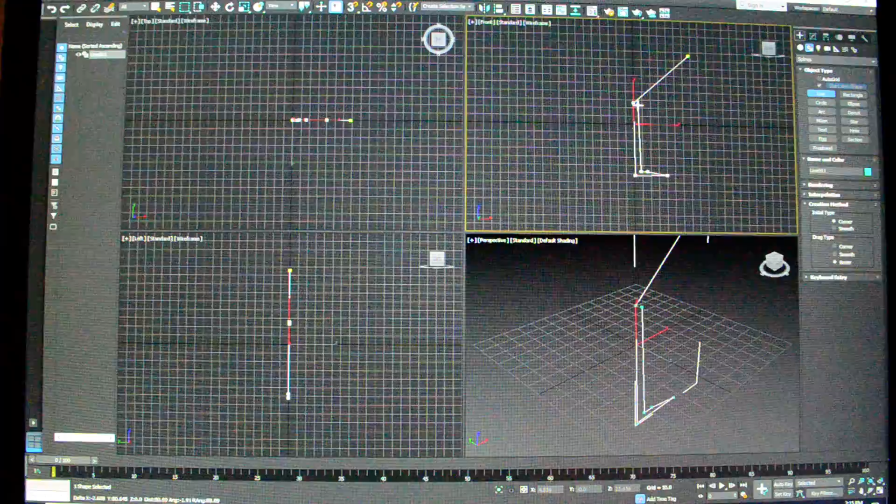Okay, I want to show you an interesting thing you can do with a modifier on splines. So what I'm going to do is I'm going to select line, and I'm going to create a line that is roughly the shape of a martini glass. And I would want to rough this out. Yes, I want to close my spline. I'm going to rough this out, and then I would come in and really clean this up.

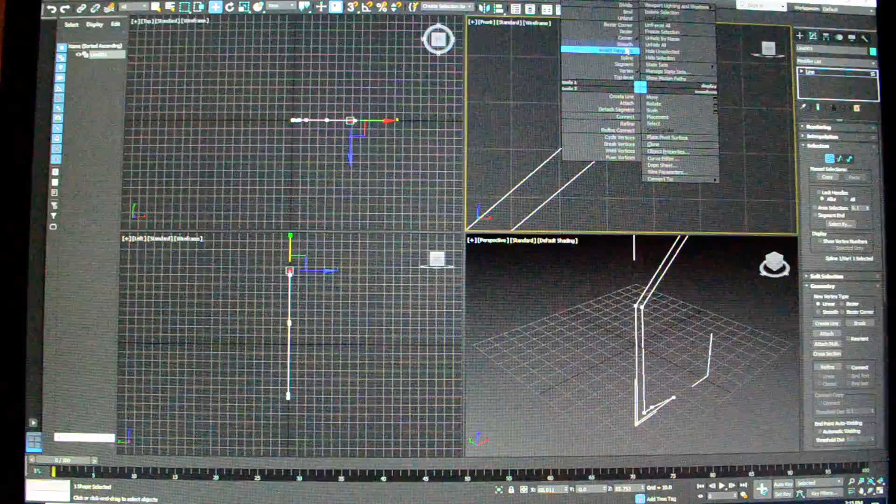Like, for instance, I definitely wouldn't want that sharp edge. So I'm going to select that vertex, right click, and make it smooth so that it rounds it out there. Probably this one too. Change that just to smooth as well. And then, that looks pretty good.

Let's come down here and insert here. Whoa. Right click, and then I want to insert another one here. Okay, and it's created a little bit of a curve there that I want, and I would probably do the same thing in here, just to refine this, because if this were really a glass, it wouldn't have that sharp corner on it.

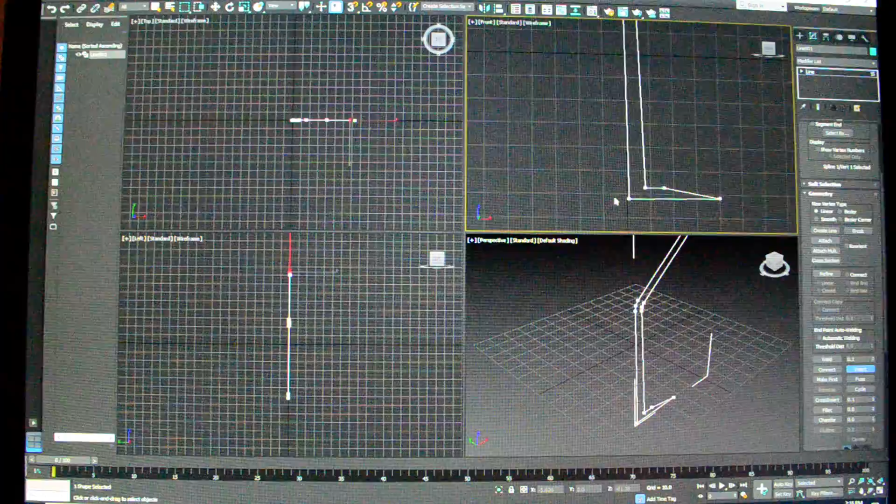Okay, and then I'm going to select it. Oops.

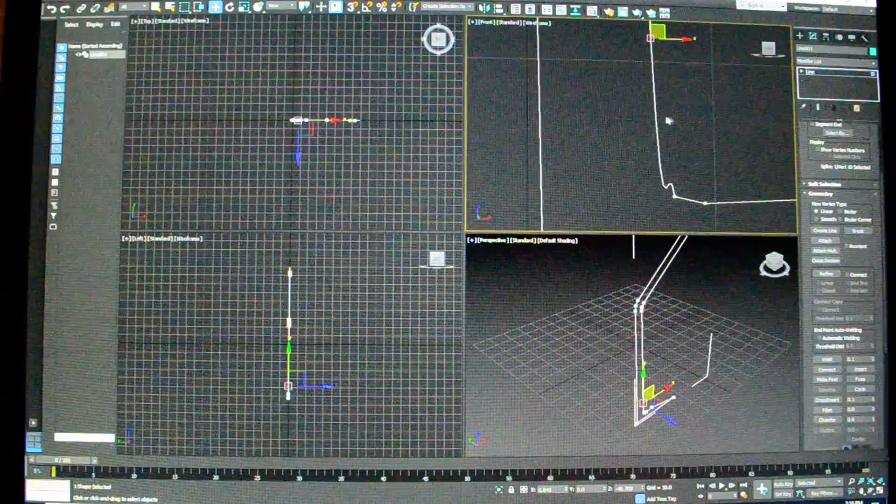Sorry, I'm trying to do this and my cat's over here sitting on my arm. Alright, I can spend hours doing this. Whoops.

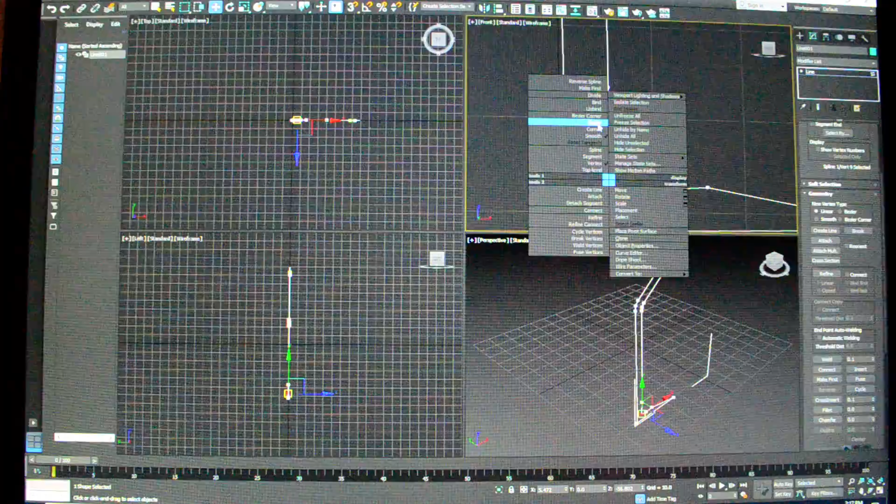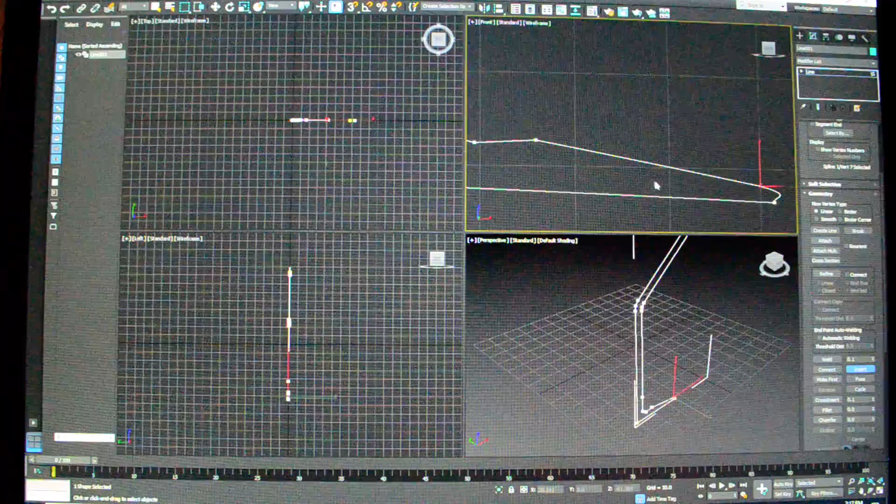Let's try to make it. There we go. Alright, so let's just say we really got this well done. Just the edge of the... I'm going to insert another one right here to help create that flat edge of that foot. Okay, so we're going to take our time, make this beautiful, make it nice.

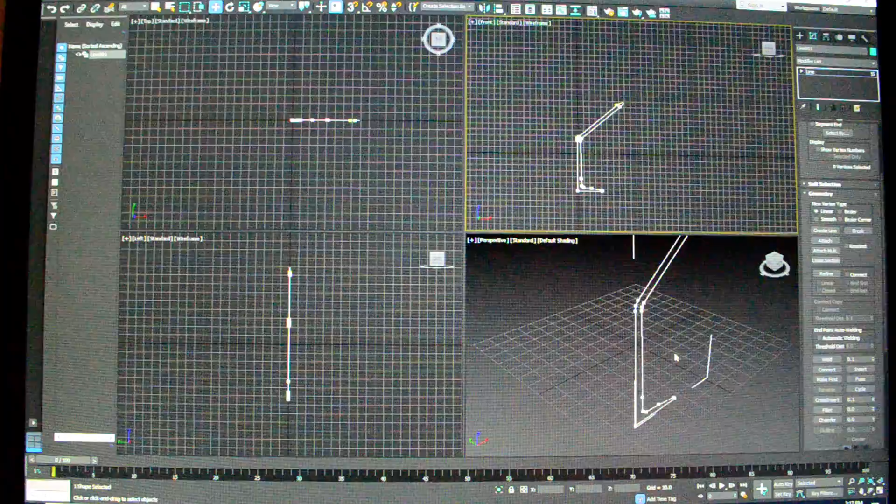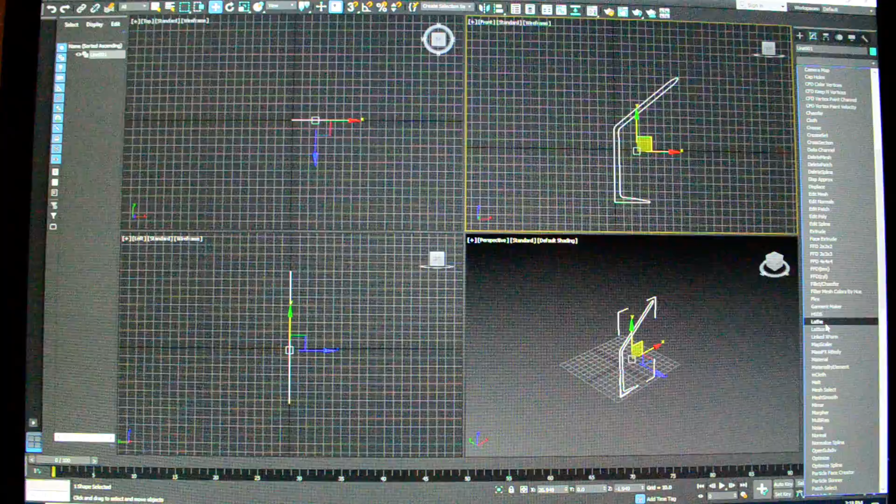Okay. So I've got this closed spline, and it is an outline, as you can see. You can see this over. And I'm going to select it. Whoops, I got to get out of the dots. Okay, so I'm going to select it. And modify, I'm going to pick lathe. And it's going to spin it 360 degrees. I can make it spin less, right? I can do a fraction of this.

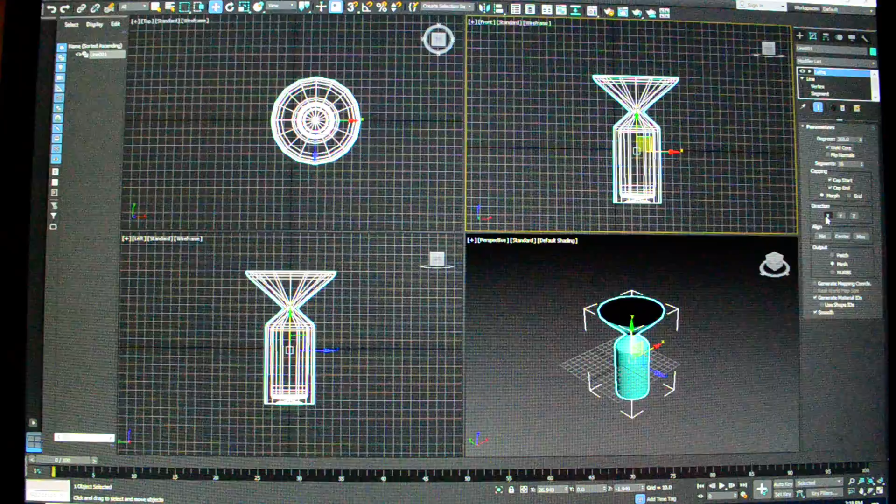Weld the core. How many segments do I want? We'll start with 16. Now the direction is X. The way that it spins it, that's along the X axis. There it's spinning it on the Y. There it's spinning it on the Z. Okay, so we're going with the Y. And then minimum, center, maximum. So it spins it in different directions. So I always just kind of cycle through those to see what looks right.

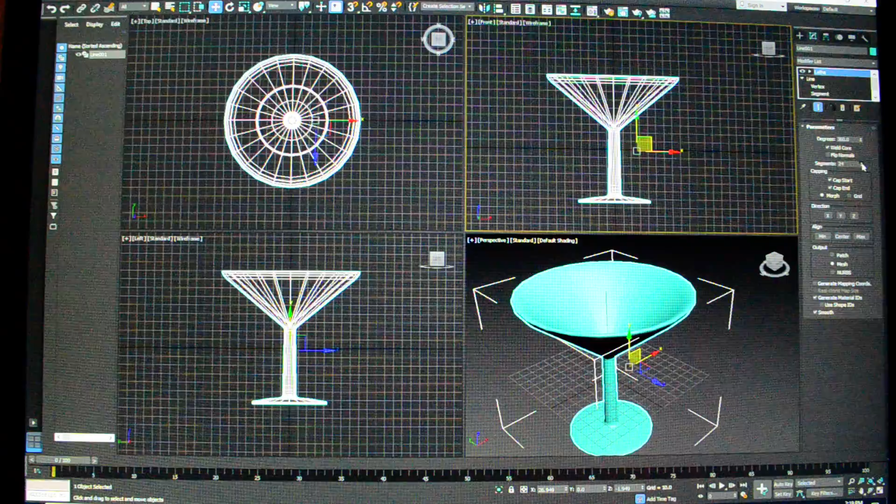And voila. I want this to be a martini glass. Probably going to have to go up around 32, 40. Let's do 40. That's pretty good because I can do a turbo smooth on it. Okay. And there you go. Pretty cool. Let's pick this up off the ground here.

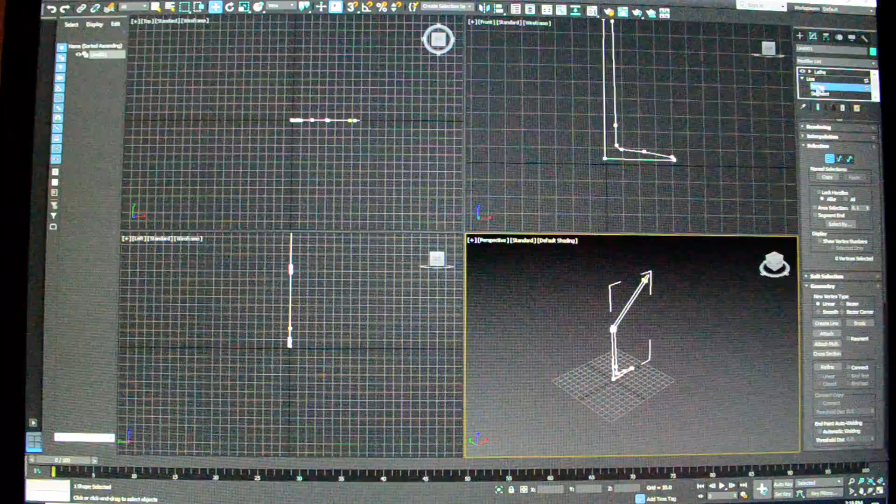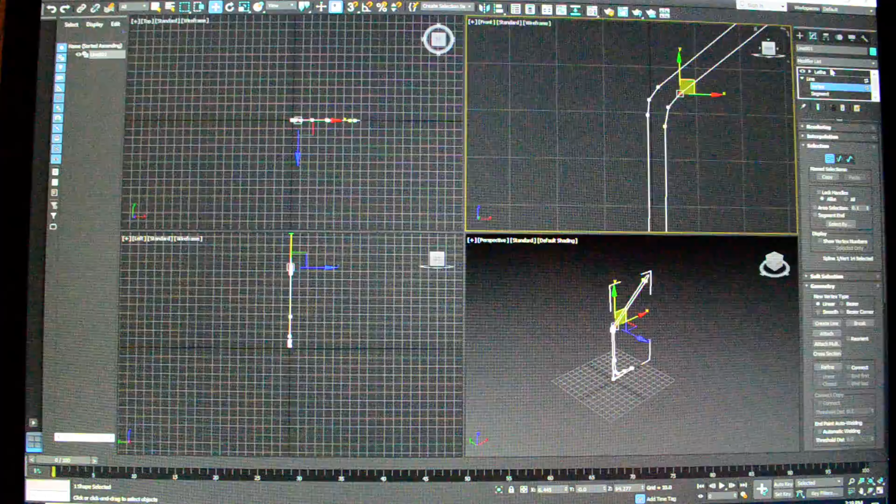And the nice thing is I can always come back and make adjustments to my original line if I don't like something. So I can come in and make a modification to this. Say I want to make this thinner. And come in and make changes. And I'm going to go back to my lathe, and it'll have cleaned it up.

And then on top of that, I'm going to add my turbo smooth. You always want the turbo smooth to be last because it's going to apply to everything down below it. And that's really cleaned up. You know, I had some faceting in here. It's really cleaned it up. I might also want to go in and fix this. It's got that little vortex in there.

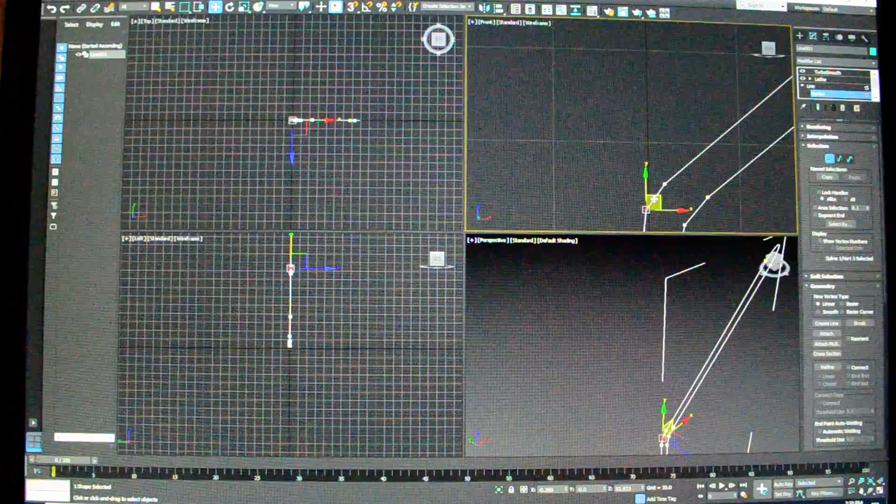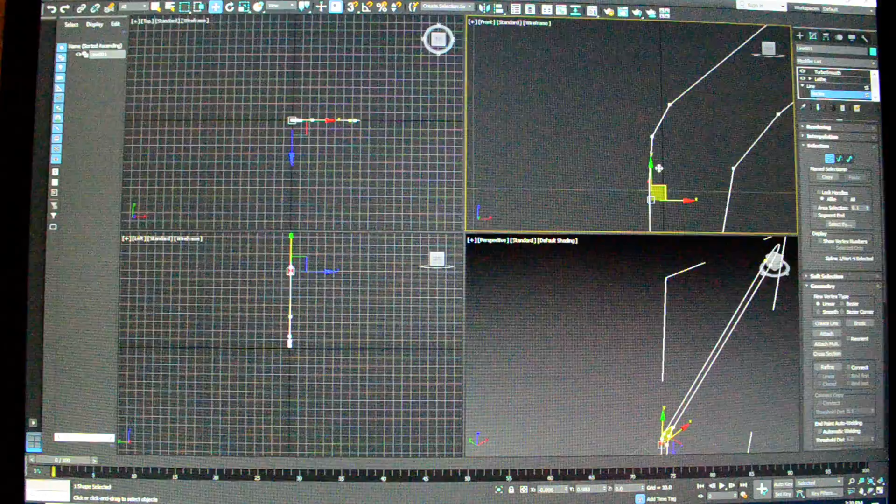And the way I would do that is click on the line. And let's bring this over. Let's see how that looks. It's still in there, but let's do this. Still a little tiny one in there, but it's not too bad. And so now I have a martini glass.

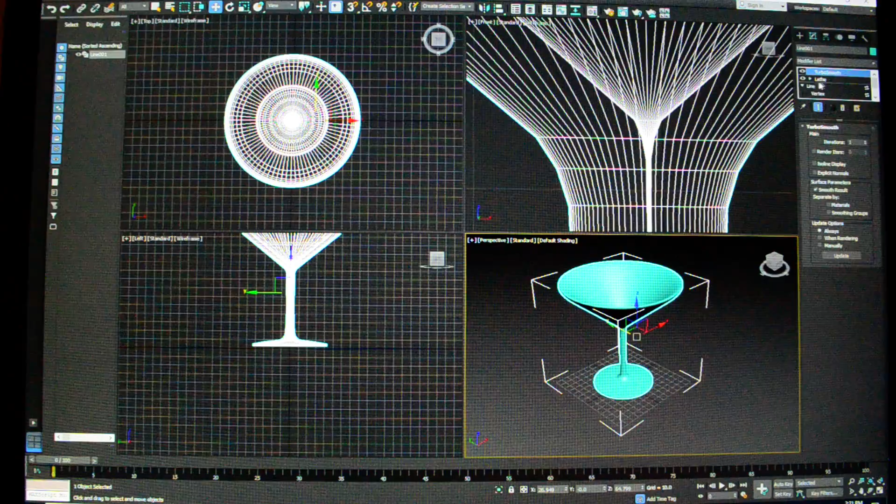Okay, and that is the Lathe Modifier. L-A-T-H-E. And that is how you get your Lathe Modifier to turn into a martini glass. Or any other shape. You can do this with any other spun object that you want to work with.